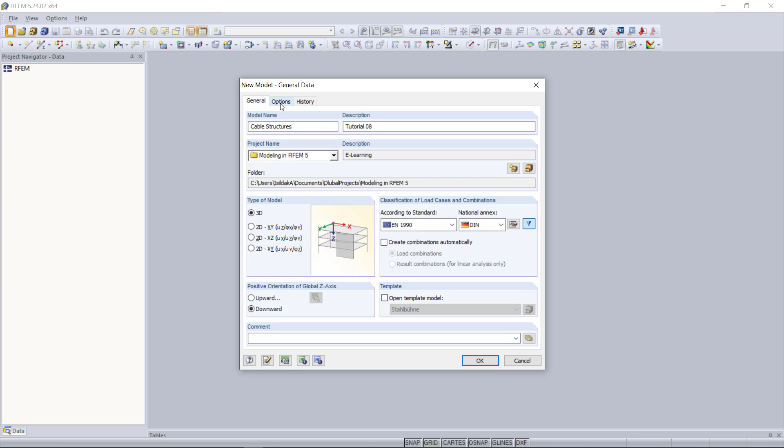So we can see here the dialog for the general data, and here we have to define a few more settings than usual. First, we will select instead of a 2D model, a 3D model. Then we have to activate RF-FORM-FINDING, which we can find under options, and then click on this checkbox here. Then we can close this dialog by clicking OK. And our example will be a mast with 4 cables. We will start with creating the mast.

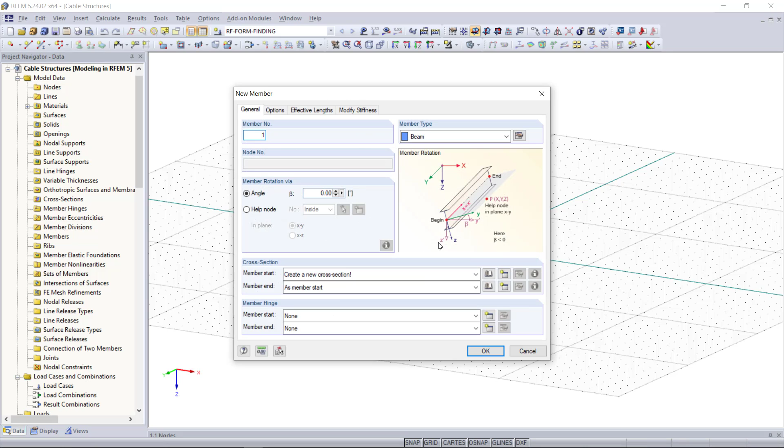For that, we will choose up here in the toolbar new member, and as cross-section we can set, let's say, a rolled cross-section, this one here. The material we can keep steel. Our mast will consist of 2 parts or 2 members. The first one will be 10 meters, and the second one will have a height of 8 meters, so in total we have a height of 18.

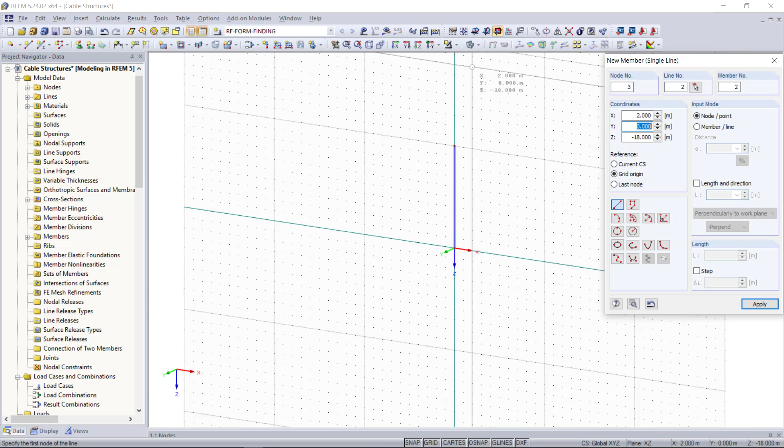For an easy way to create the member, we can change up here the work plane to the XZ plane. And the first node of our first member will begin here in the origin, up to 10, then the second one with a length of 8 meters. Now we can switch back to the XY plane, and next we will create the cables. For that, we click here on new member again. And as mentioned in the beginning of this video, we will set the member type to a cable member.

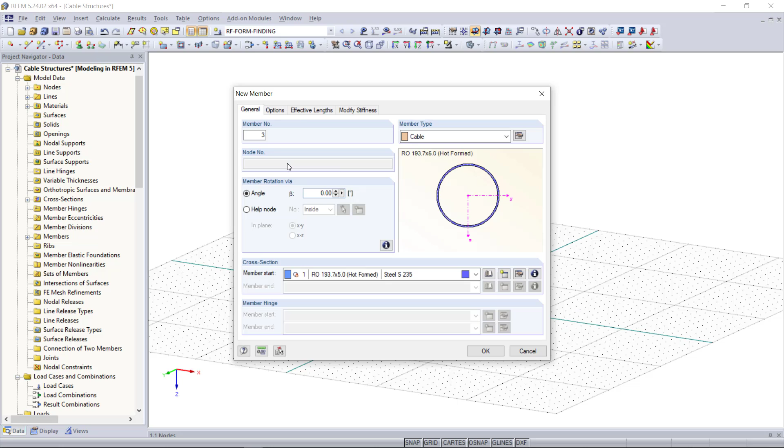Then we can open up the cross-section library once again and choose a cross-section. We will choose a solid section, and under filters on the left side, we can choose a cross-section according to any standards. And we can also find, according to the cross-section type, cables. We will choose, for example, fiber, this one here, cable PE15. Now we can click OK through all of these dialogs.

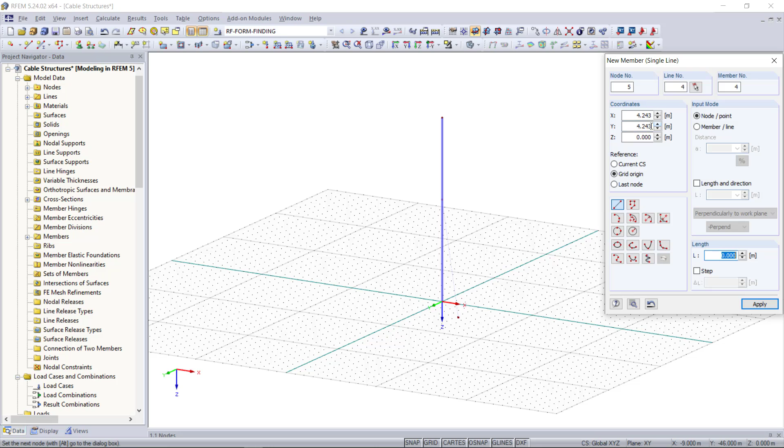We will place the first cable starting from the middle node down here to the point with the coordinates x 4.243, y 4.243, and z will be 0. We can quickly copy this cable 3 more times with the command up here called mirror. First around the XZ plane, and then these 2 around the YZ plane. Then we need also some supports, which will be hinged ones on each node.

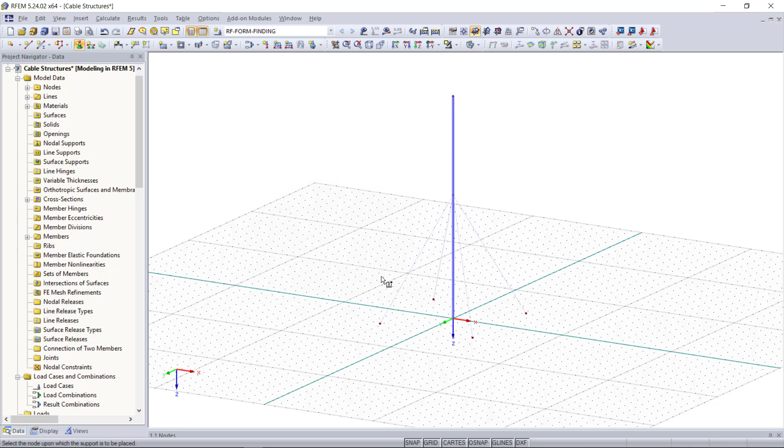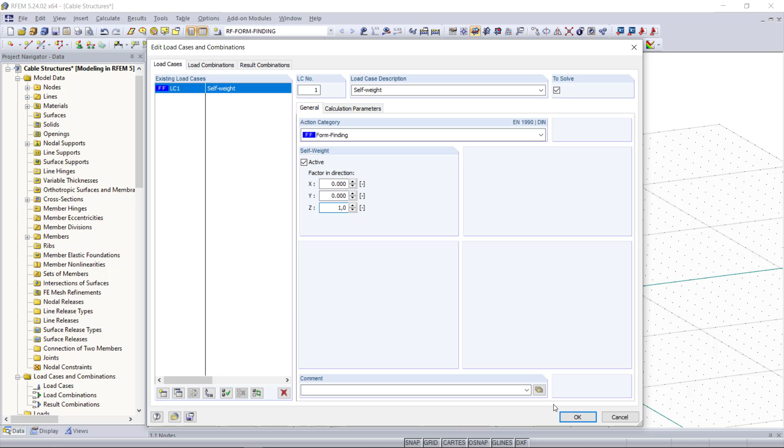Now that we have our structure, we can move on to the loads and load combinations. First, we will stay with one load case, which will be the self-weight. What's important here is to set as action category form finding, and activate the self-weight and enter as Z 1. Then we will select all 4 cables, and with double click we can open up the edit member dialog. Since we've already activated RF-FORM-FINDING in the general data, we can open up a new dialog by clicking on edit member type. Otherwise we wouldn't see this option here.

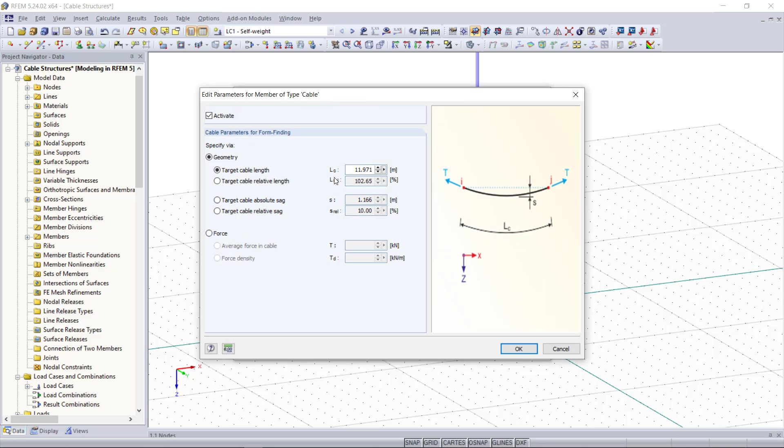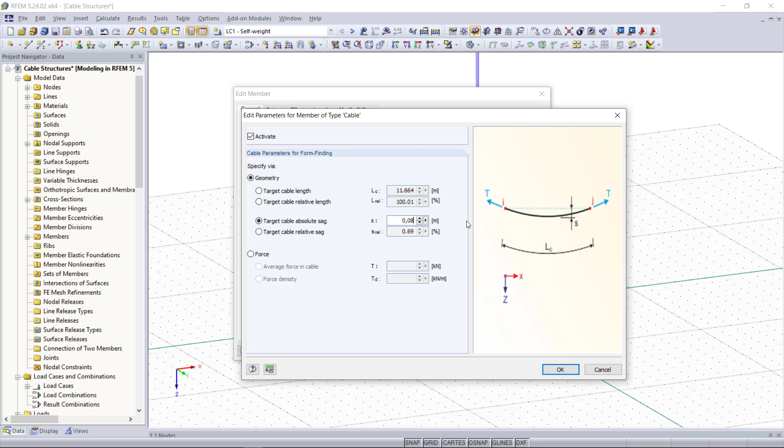And what can we define here? So we have the cable parameters for form finding. We can specify these via geometry or force. We can set a target cable length or a target cable absolute sag. For our example, we will define an absolute sag of 0.08, and the other parameters are filled in automatically, as we can see here.

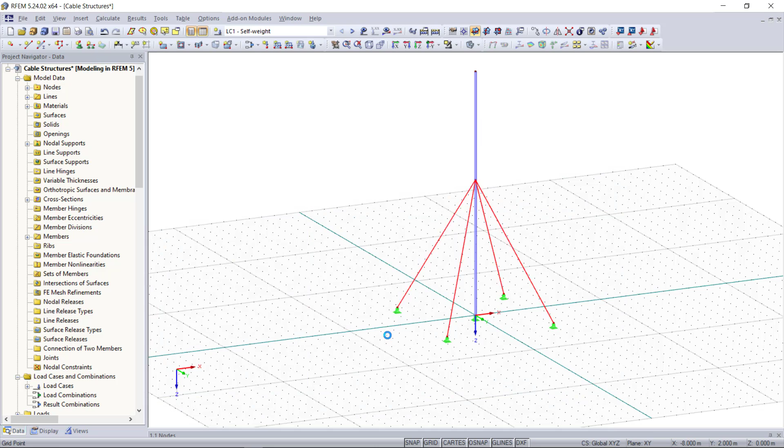Next step will be defining the calculation parameters, which we can find under Calculate. And in this dialog, we have the tab Form Finding. Here we will set a maximum number of iterations, 50, and the speed of convergence will be 0.1 to get more precise results. And now that we have our load cases and also settings, we can run the calculation and then we can have a look at the deformation of the structure.

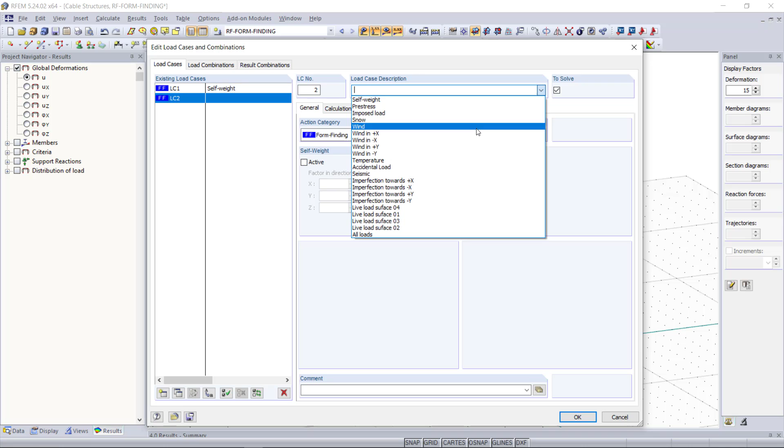As a second example, we will apply a wind load of 2 kilonewtons at the top and calculate the system again. What we can see with these results is while the 2 compressed cables do not absorb any load, the other 2 cables have a normal force like it should be.

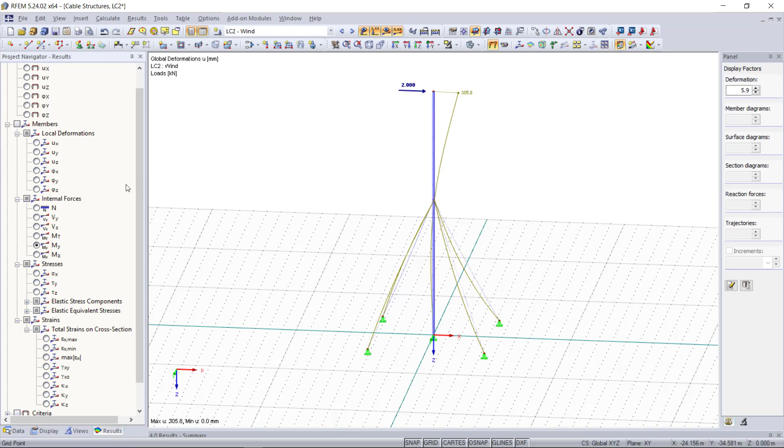It's also interesting to have a look at the calculation diagrams. For this, we go back to the dialog of the calculation parameters. In the last step, we can have a look at the calculation diagrams. Here we can see why the calculation according to the theory of third order takes longer and how the calculation approaches the final results with each iteration step.